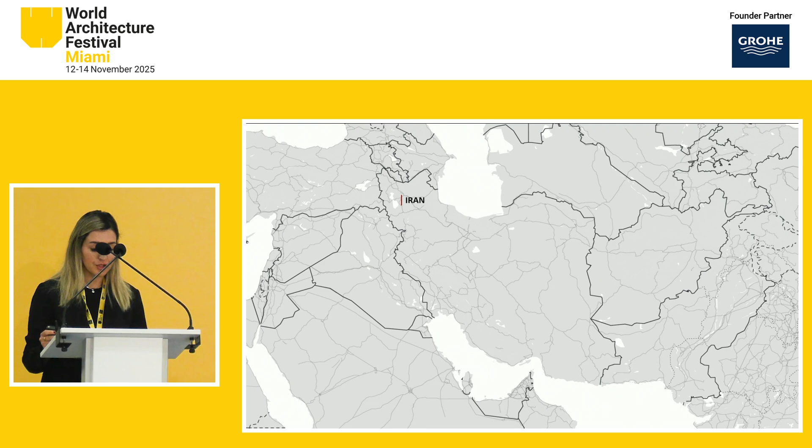Shahrzad project is an ongoing construction located in Tehran, Iran, and currently it's in the future development phase. Shahrzad was first assigned to our office in 2017, and it was an incomplete, half-built commercial structure, originally intended for retail use.

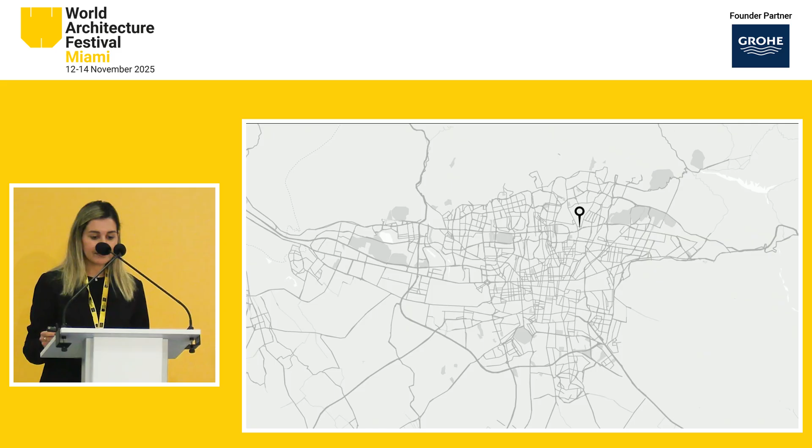Tehran today has over 400 commercial centers, and many of them, as we anticipate, are destined to fail due to oversupply and lack of distinct identity. The question we asked ourselves was, would Shahrzad become just another one of these forgotten malls, or could we transform it through a new program or specific vision into something different?

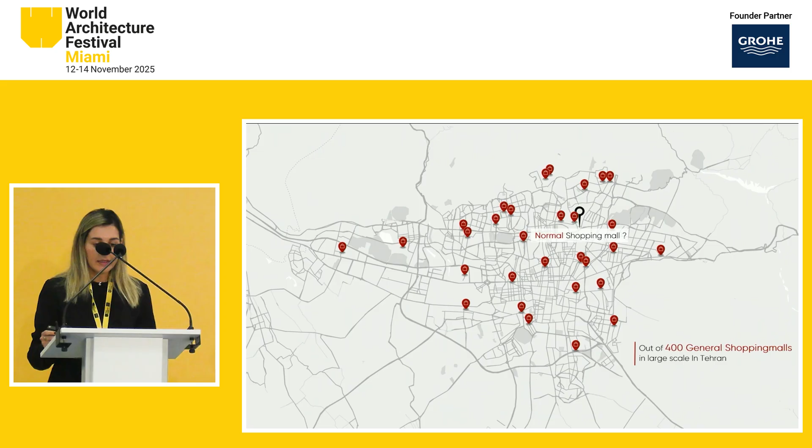Through our feasibility studies, we observed two distinct behavioral patterns. At night, the area is mostly visited by families. During the day, it's mostly individuals. Therefore, we realized we were designing for two separate user groups, one family-oriented and social, and another individual and independent.

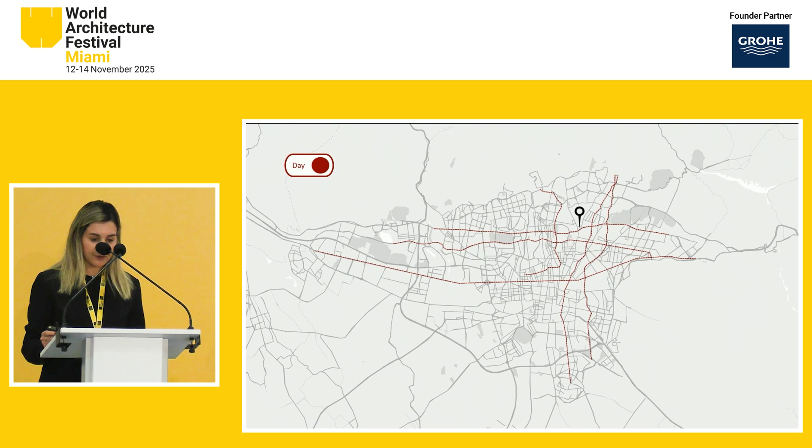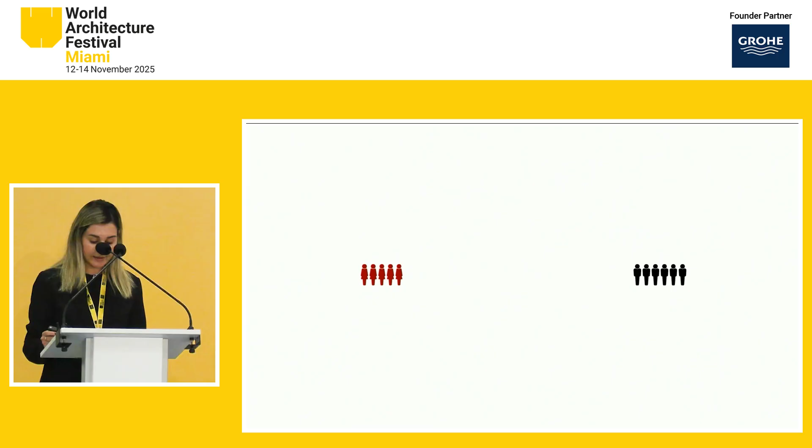Considering this demographic and the mostly presence of women, and the fact that in Iran activities such as wellness, fitness, and beauty salons are gender separated, we saw an opportunity to dedicate the upper part of the building to a women-focused urban center, a high-quality, safe, and inclusive environment which is really rare in Iran.

Based on a careful assessment of the existing structure, around 13,000 square feet was demolished to create a central void to bring in natural light, air, and a special quality to the heart of the building. This central atrium now allows daylight and visual connection throughout the project, giving new life to what once was a dark, closed concrete shell.

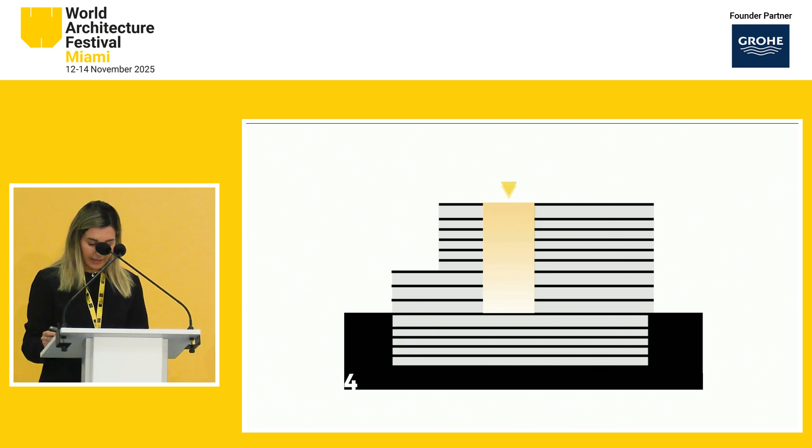Given the complexity of the program, we decided to use two distinct architectural languages to express the building's dual identity. These two worlds are separated by an intermediate floor acting as a threshold between them.

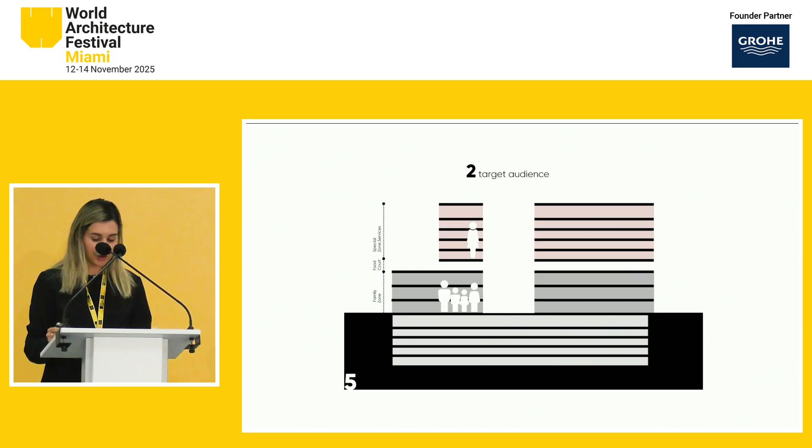The upper level, dedicated to women-only programs, is enclosed within a continuous pattern scheme, a unifying element that distinguishes this space both visually and conceptually.

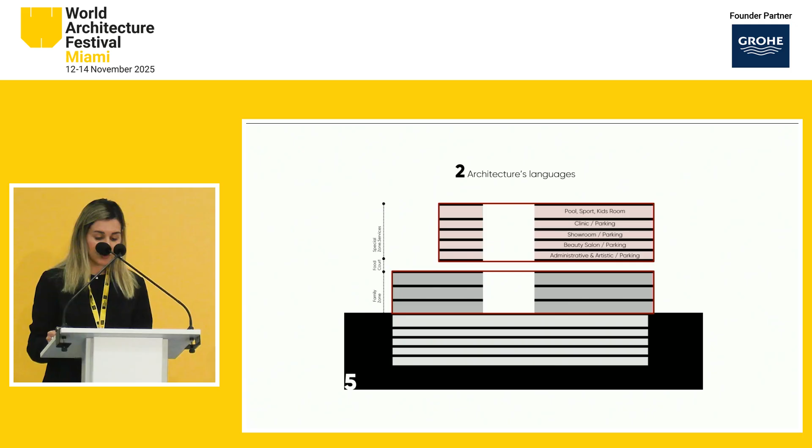The ground, first and second floor function as a public commercial center, much like any other family-oriented retail complex. The third floor acts as a food court, but also a divider between the public and women's private realm. Above it rise 5 specialized levels, each dedicated to specific activities like administrative and creative offices, beauty salons, fashion atelier and showroom, and clinic. And at the top, the spa and fitness center.

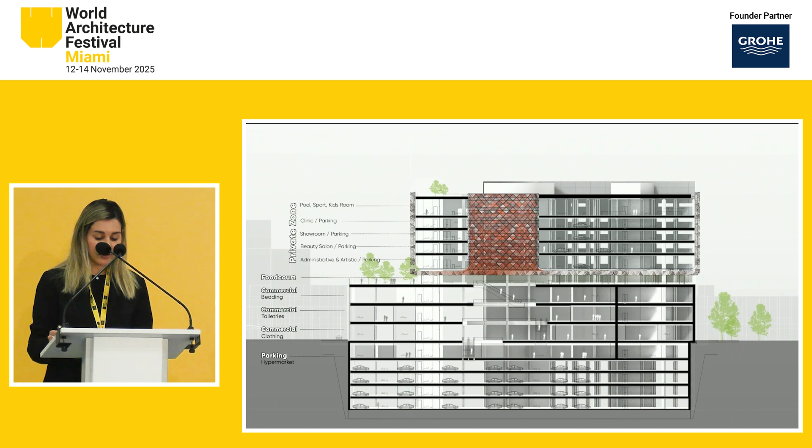A ramp extends up to the 7th floor, allowing direct vehicle access and parking on every level.

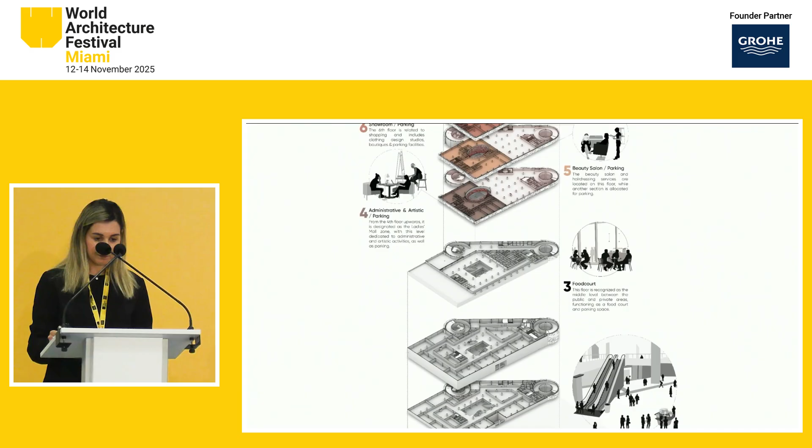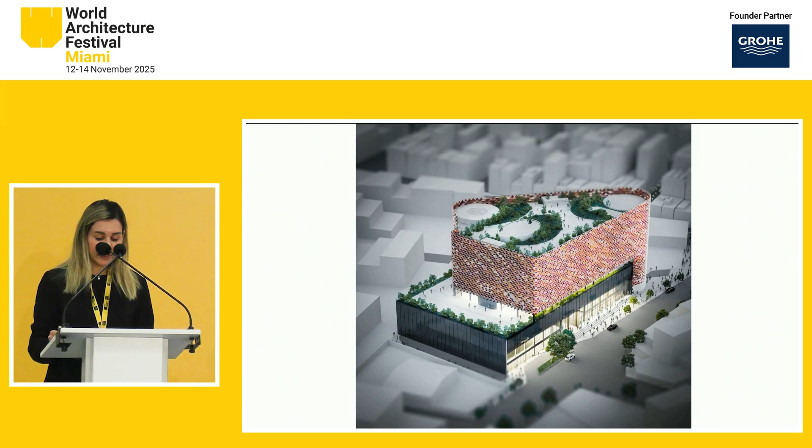This rendering clearly shows the building's dual character, a colorful, expressive, and delicate upper wall resting upon a neutral, cubic, and rigid base. The lower part of the building serves as a public retail area, with a geometry that is cubic and restrained.

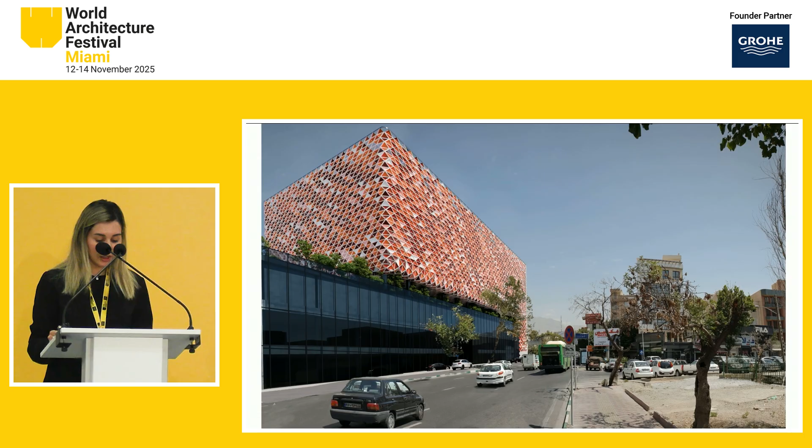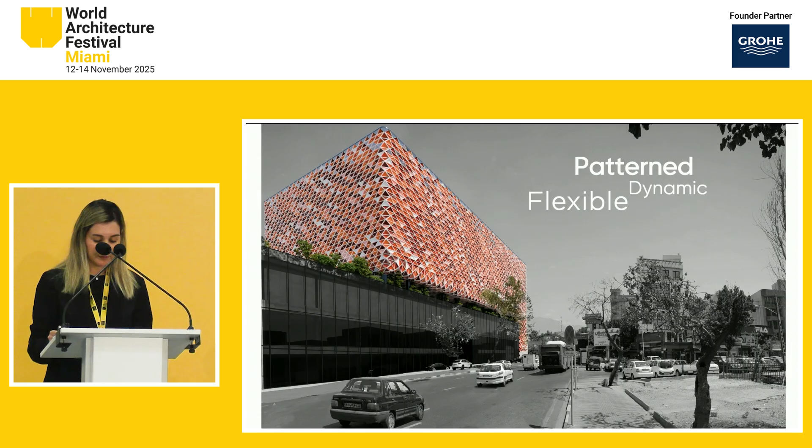The upper part, dedicated to women, is patterned, fluid, vibrant, and colorful.

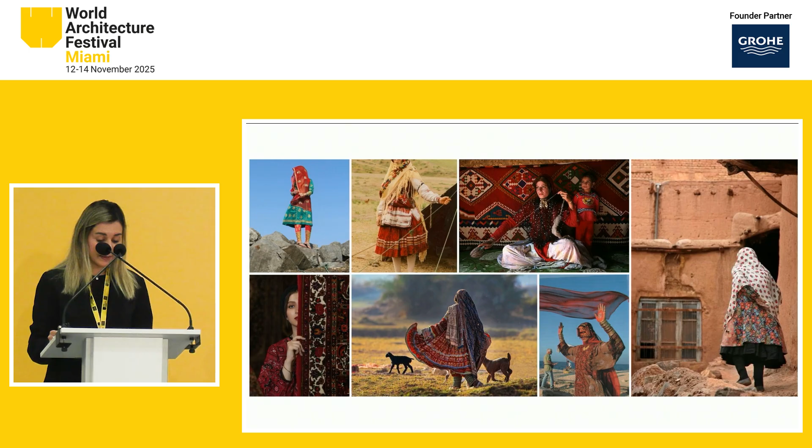In Iranian culture, womanhood has always been associated with color, energy, and ornamentation. This relationship inspired the design of Shahrazad's colorful facade, a poetic interpretation of Iranian women and Iranian architecture, which is known for a complex play of color, light, and shadow.

With its warm, dynamic tone, it brings energy and life to the structure, symbolizing the spirit of the Iranian woman. The pattern schemes represent the internal program, opening or closing, through a triangular geometry that allows adaptability and flexibility.

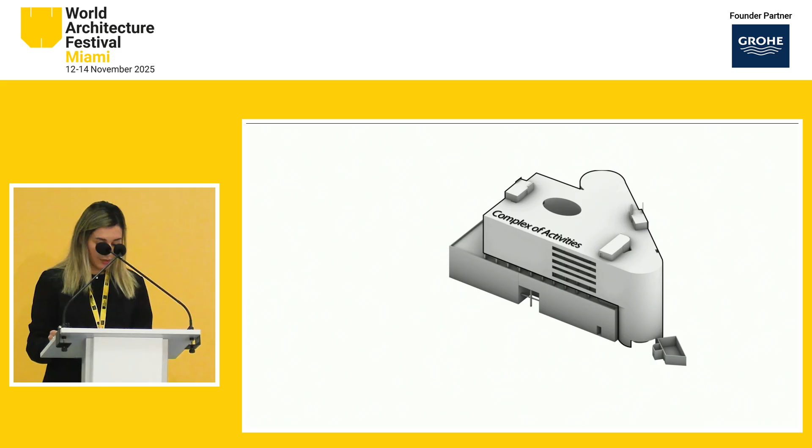The upper zone, composed of women-oriented space, is organized around the central void and unified by this continuous facade. This envelope extends inward, blurring the boundaries between exterior and interior, so the facade itself becomes part of the interior experience.

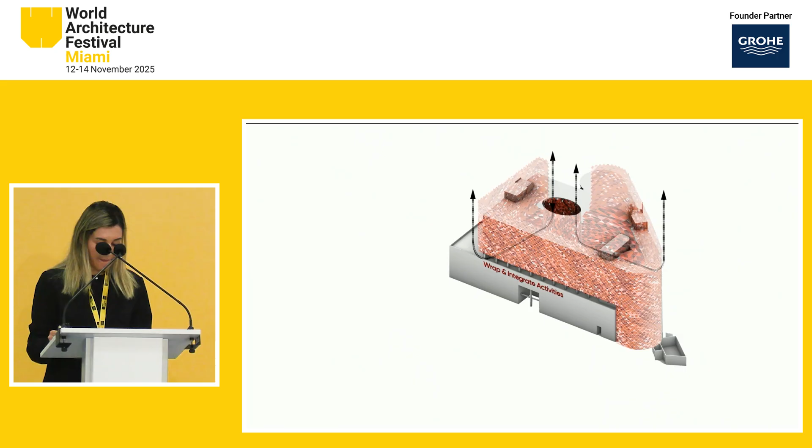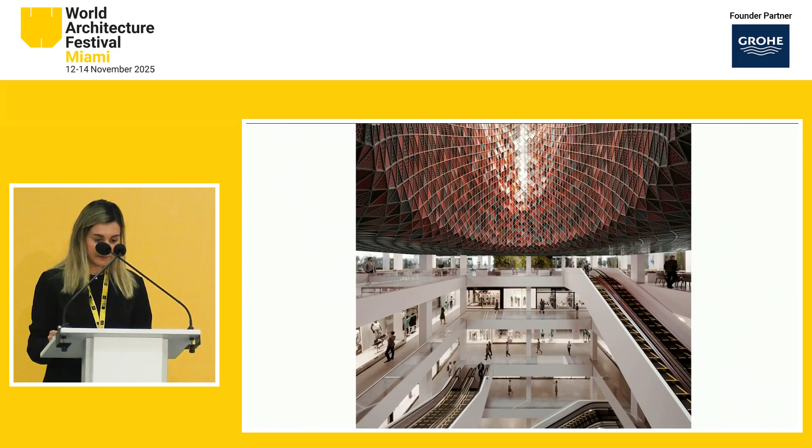This continuity between inside and outside, between structure and space, is a key architectural concept we explored throughout the project. Even from the lower public floor, the skin is visible, revealing a glimpse of the colorful upper world from within.

The contrast and dialogue between the two layers, solid versus light, neutral versus vibrant, create an evolving visual experience across the levels.

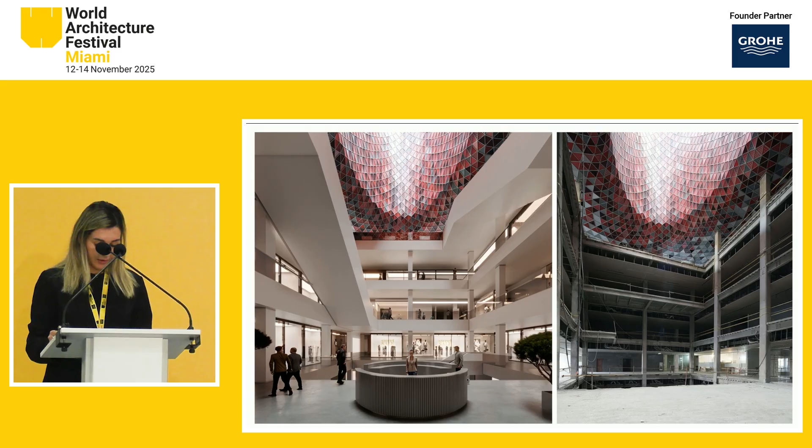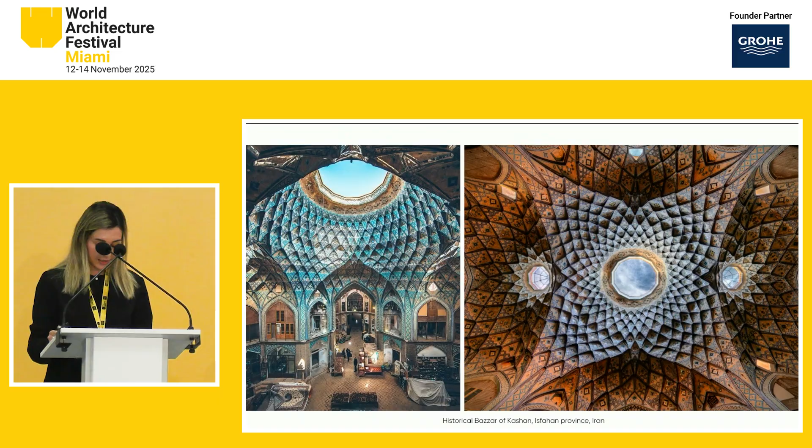The colorful facade aims to bring life and energy to Tehran's typically gray urban landscape. If we look back to traditional bazaar skylights in Iranian architecture, we find a similar metaphor, opening to filter light, color, and atmosphere into interior spaces. In Shahrazad, this idea reappears as a contemporary interpretation of this heritage.

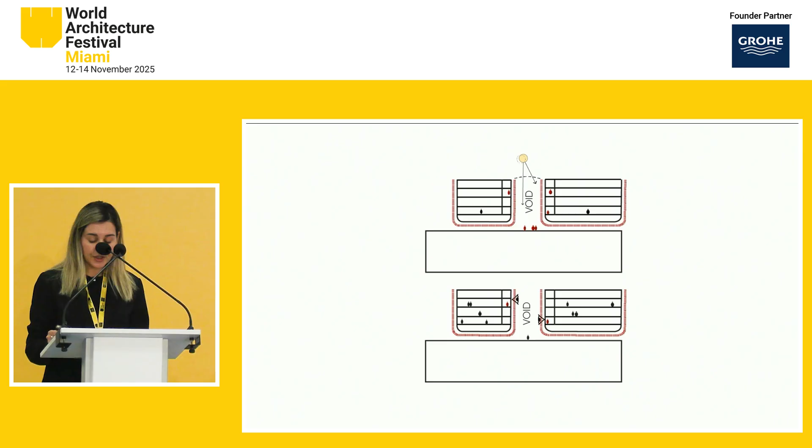The skin allows filtered daylight and visual transparency across the floors. From the inside, it offers framed views outward. From the outside, it reveals hints of interior life and activities. This creates a continuous journey of light through the project, a visual, emotional connection between levels.

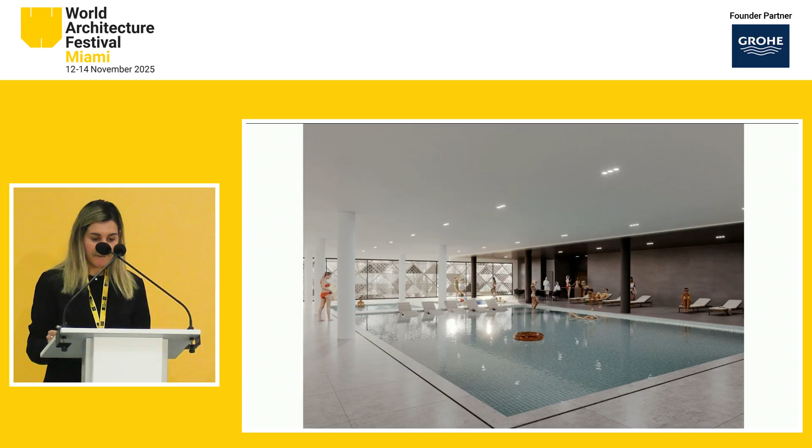In conclusion, Shahrazad is a reflection of its time, a project that addresses the role of women in contemporary Iran, and reimagines an overlooked typology into something meaningful, inclusive, and alive. It uses architecture as a tool to empower, connect, and redefine what an urban building can represent in today's Tehran.